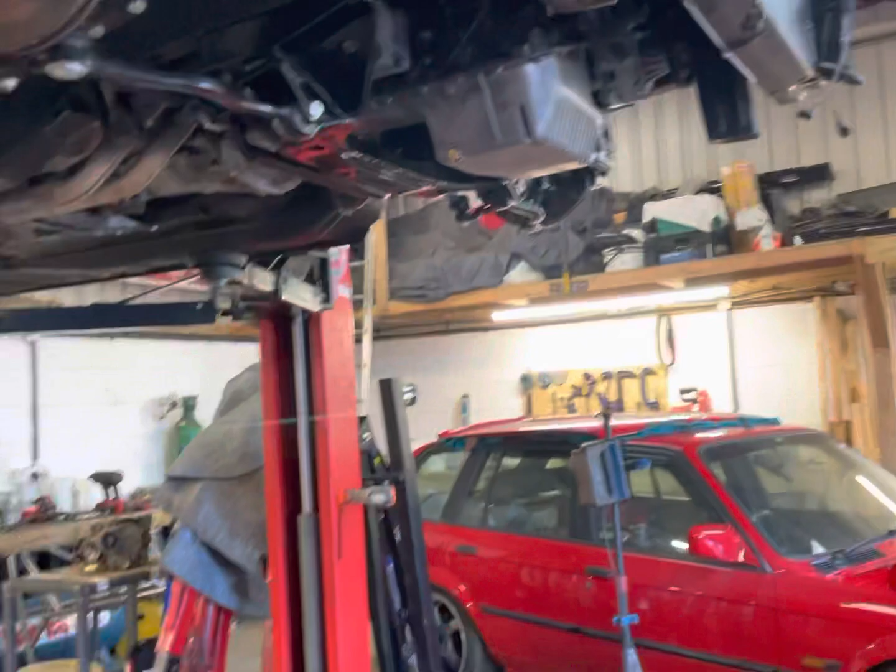There we go, she's outside. So we'll drop the E28 down and I'll let you know what we're doing in today's video.

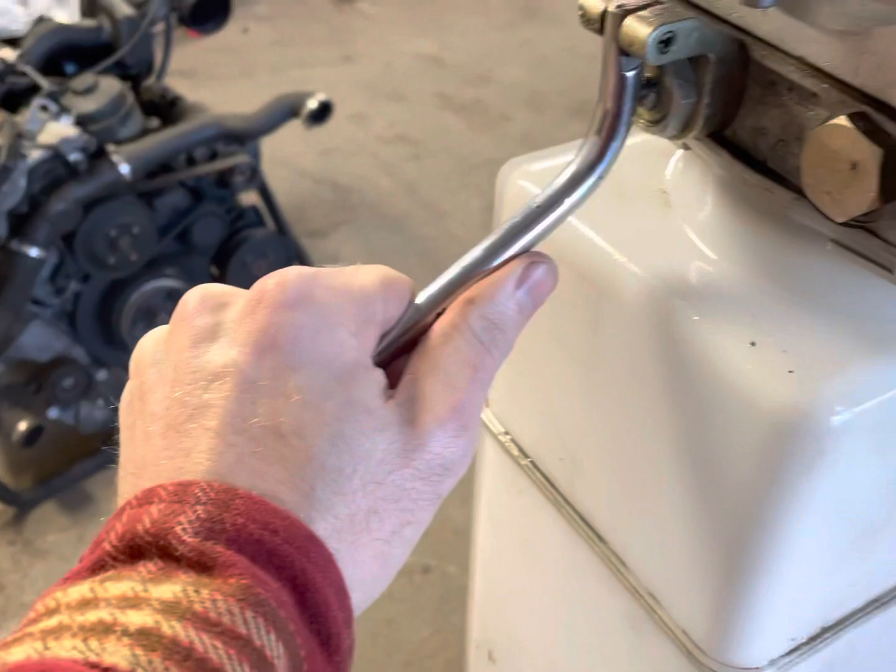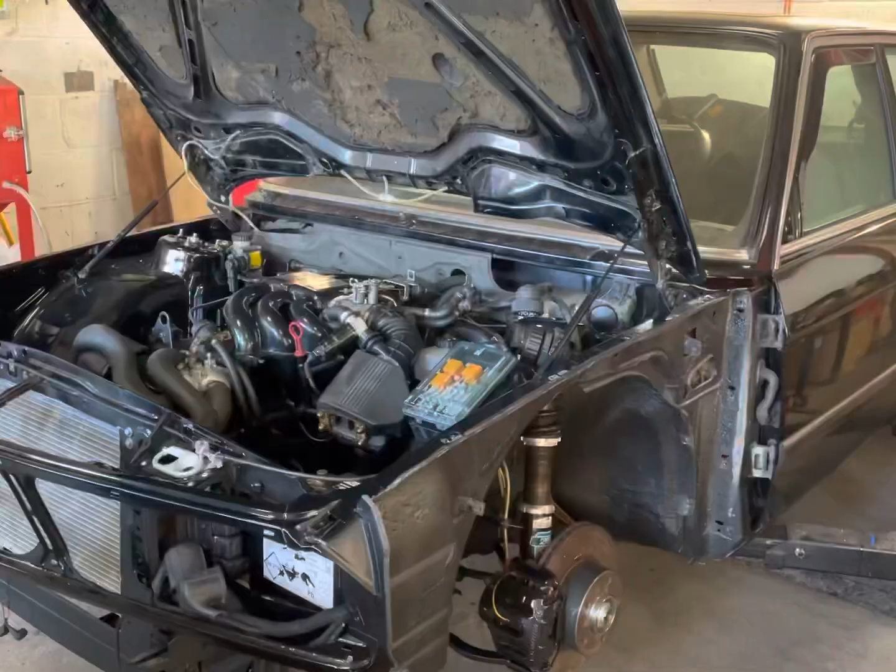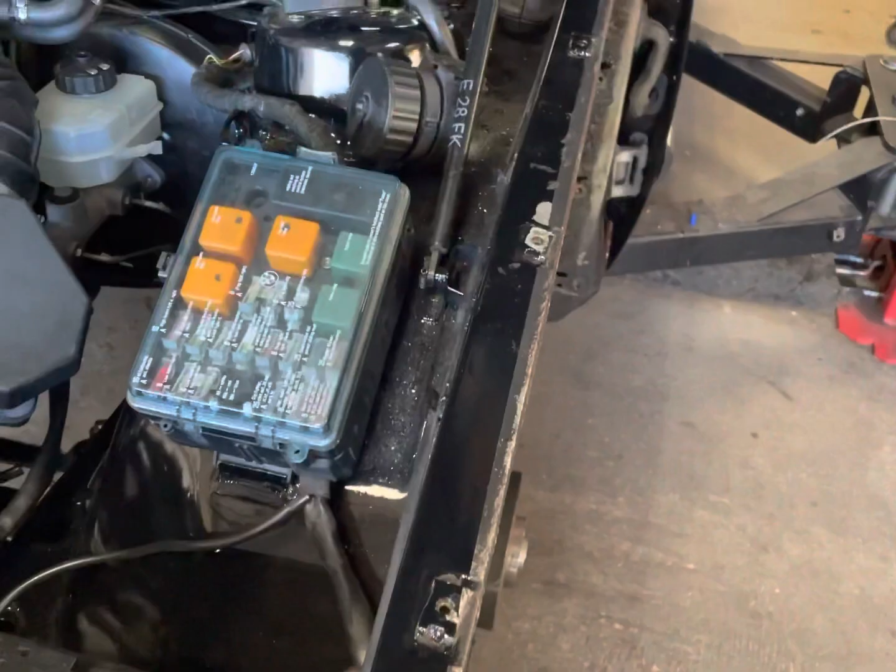So for those of you that don't know, this is my 1987 BMW E28. Obviously it's Euro spec. It came with a 520i, and we've converted it to M20B25 from an E34, so it's the later motor, and it's a 2.5 instead of a 2.

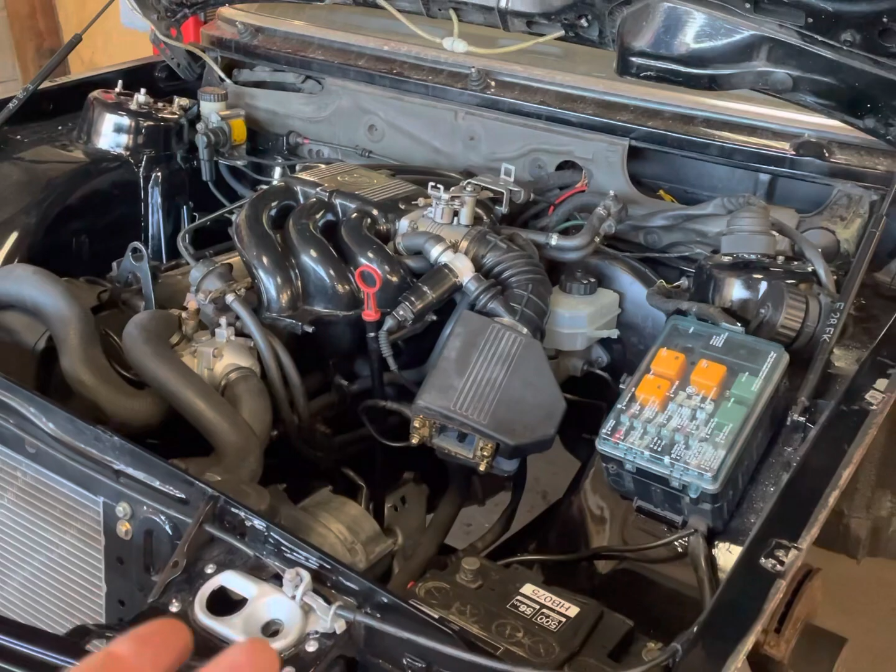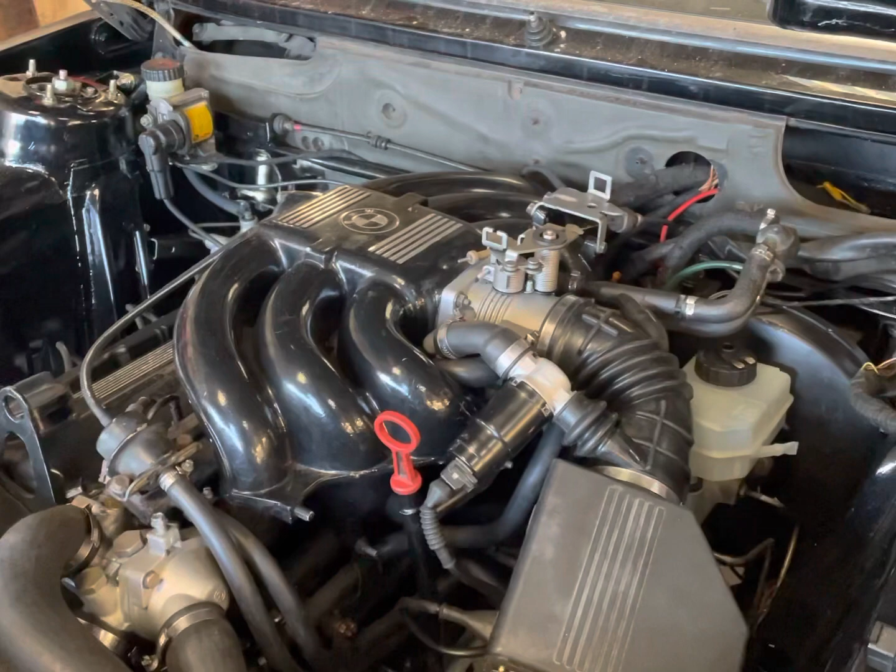If you don't know, the E34 M20s used Motronic 1.3, which is an updated version of the ECU, basically the software for running the engine. There's a lot of differences, they're a much more efficient engine from what I can tell. They're about 170 brake in the B25 configuration instead of 129 in the 2 litre. But yeah, there's lots of updates on this engine, it's a lot better than the B20.

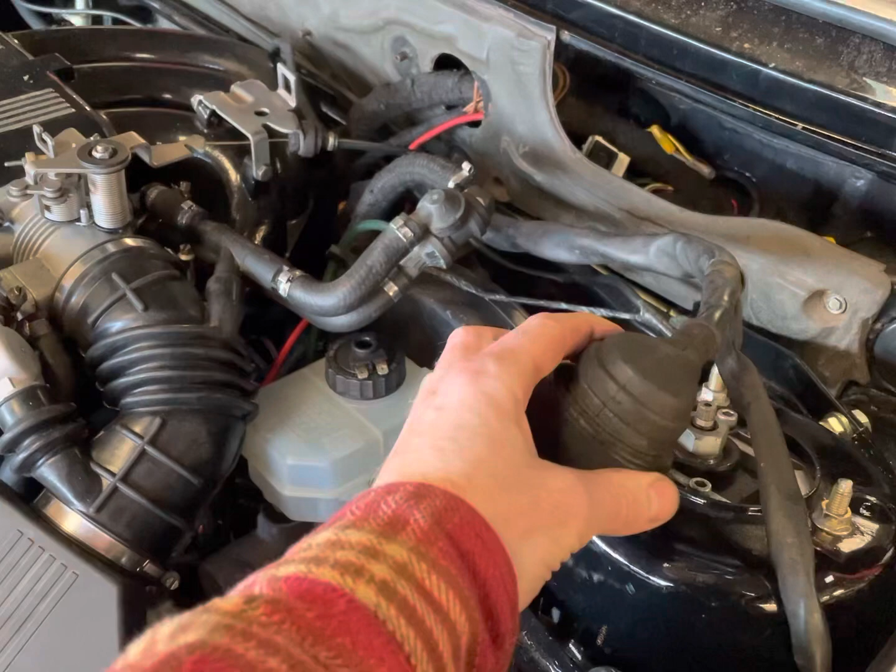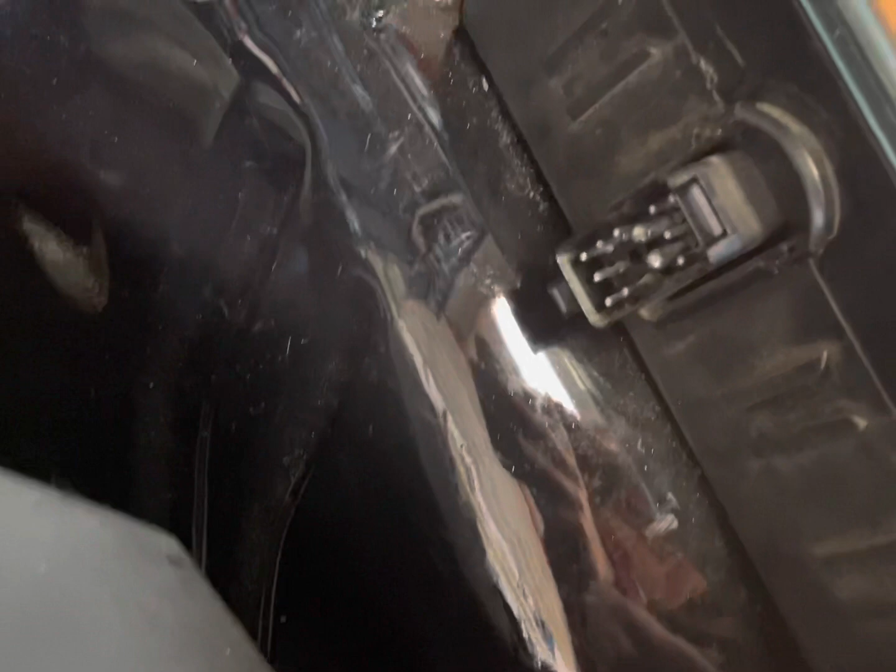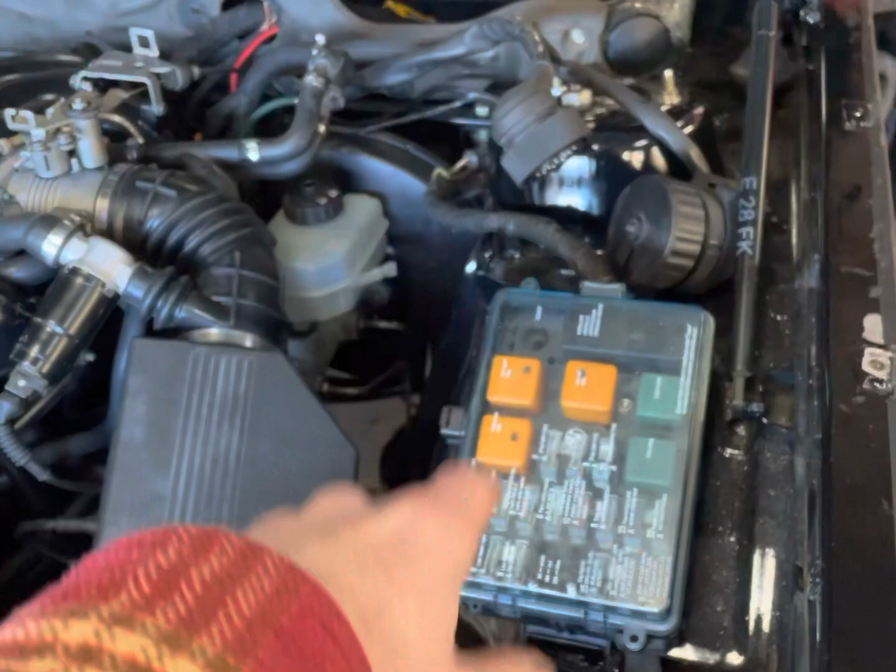Obviously the car uses the E34's plug, which is the E34 C101, this round plug. The E28s have this C101 plug which is square, and obviously this does not fit that. So what you can do is buy a harness adapter, which basically plugs into here and makes everything chooch and run.

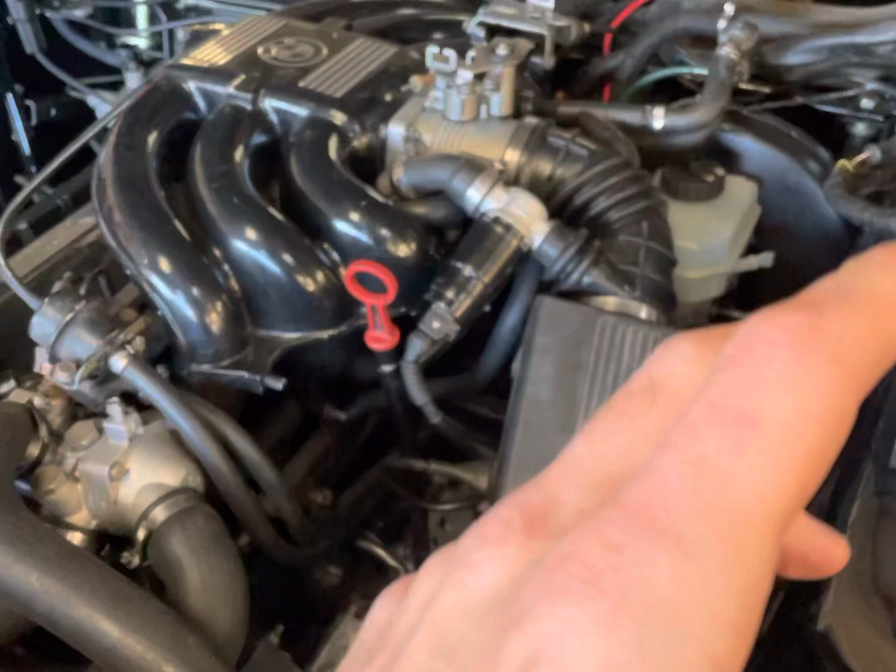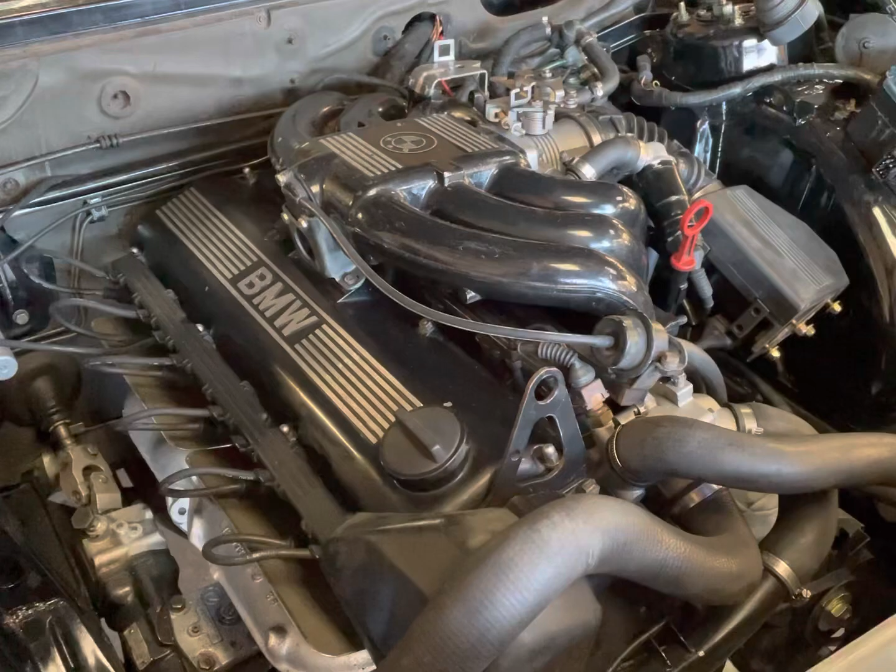I reached out to a company called Condor Speed Shop in the States. They're quite well known for making cool parts for BMWs, so I reached out to them and told them what I was doing, and they were like, yeah, we can definitely help you with that. So I'll show you

the plug for adapting the E34 C101 to the E28 fuse box plug.

So here we have a parcel from Condor. They sent us a nice little beer cozy. We don't really do them over here in the UK, it's not really a thing, but I'll definitely put it to use. We've got a sticker that can go on the ramp.

And this is the Loom Adapter. So I'll get a knife and we'll cut it open.

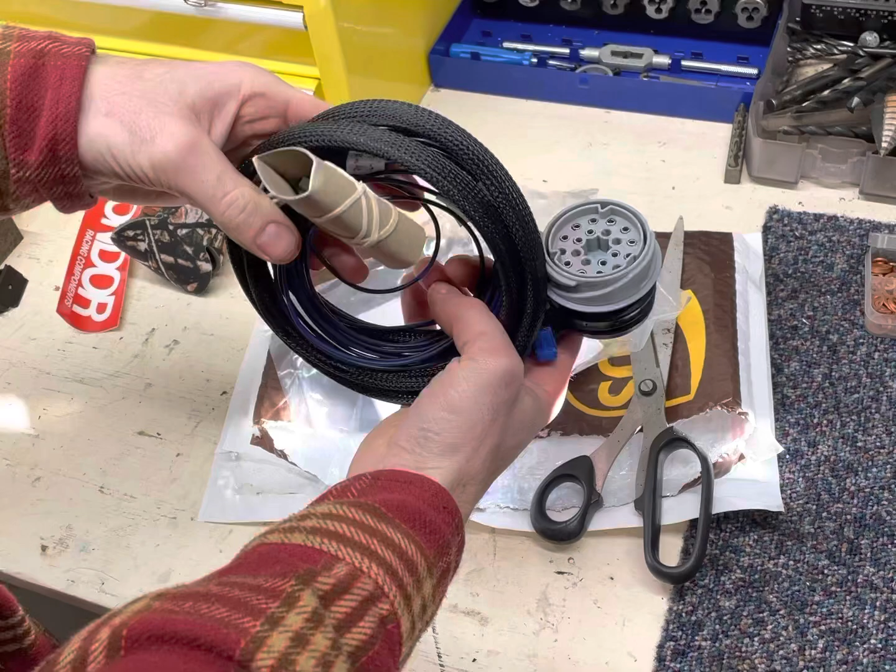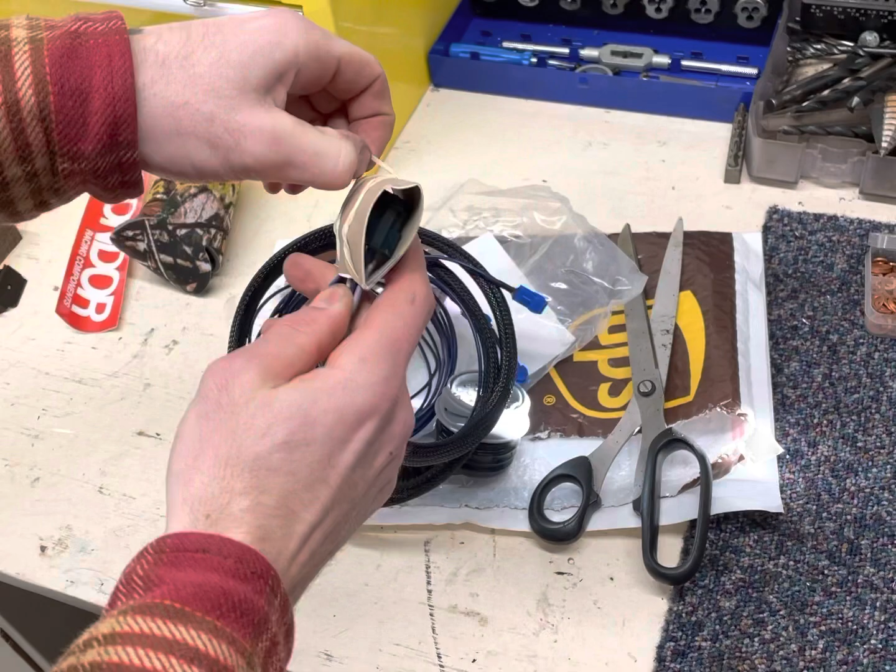Right, so as you can see, we've got the loom here. So you've got the round E34 C101 into the square E28 C101. So you get plenty of loom to go at, so you've definitely got enough room to tuck it away out of the way.

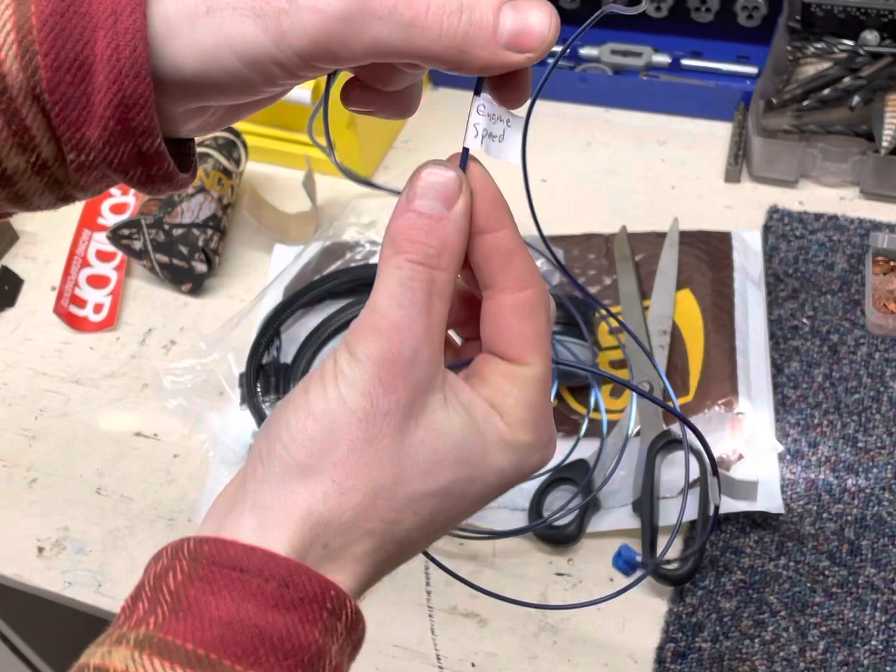There are these alternative sensors, so you have engine speed, you've got vehicle speed, fuel rate, I think that's it, yeah. So you've got fuel rate, engine speed and vehicle speed.

So these, as you can see, they've got like a clip on them, and they basically clamp onto the wires behind your dash. So there's a little plug, I'll show you in the car, there's a little plug in the dash that you need to put these connections on to get your RPMs and your fuel rate on your dash and stuff like that. Obviously the car will run without this stuff, but it's nice to have it built into the loom, and it's as simple as just opening this clamp and shutting the clamp on the wire that's behind the dash.

So it also comes with your instructions. So you've got how to install it basically. Start removing this square C101. Only push or pull from the highlighted areas. The tabs can be damaged if too much force is applied.

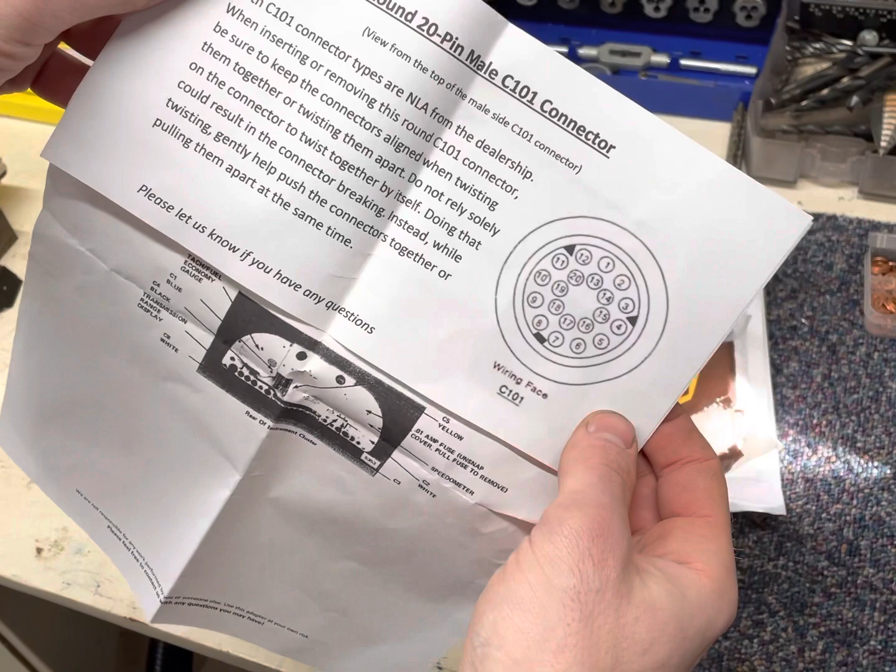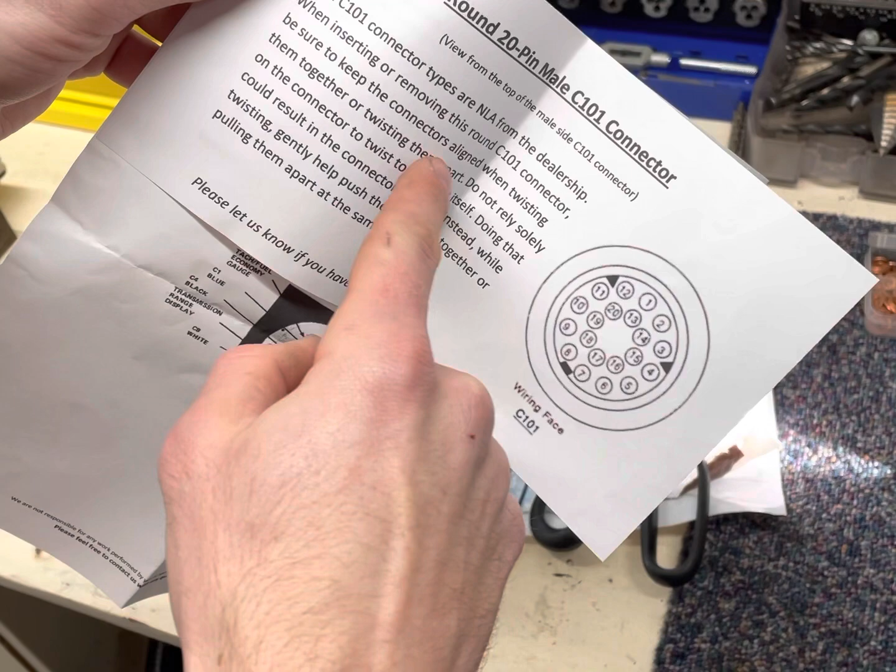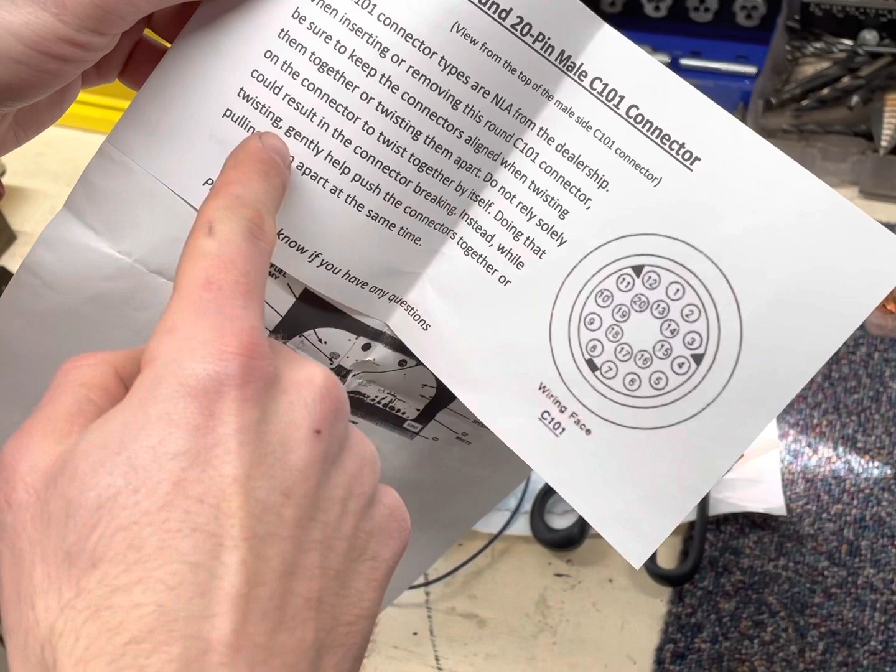And you've got this as well: both C101 connector types are no longer available from the dealership, but when inserting and removing this round C101, be sure to keep the connectors aligned when twisting them together or apart. Don't solely rely on the connector to twist together by itself, as that could result in the connector breaking. Instead, while twisting, gently push the connectors together or pull them apart at the same time.

So you've just got to be careful with them, because these are like reproduction plugs, so they're not as good as OEM, but they're pretty good.

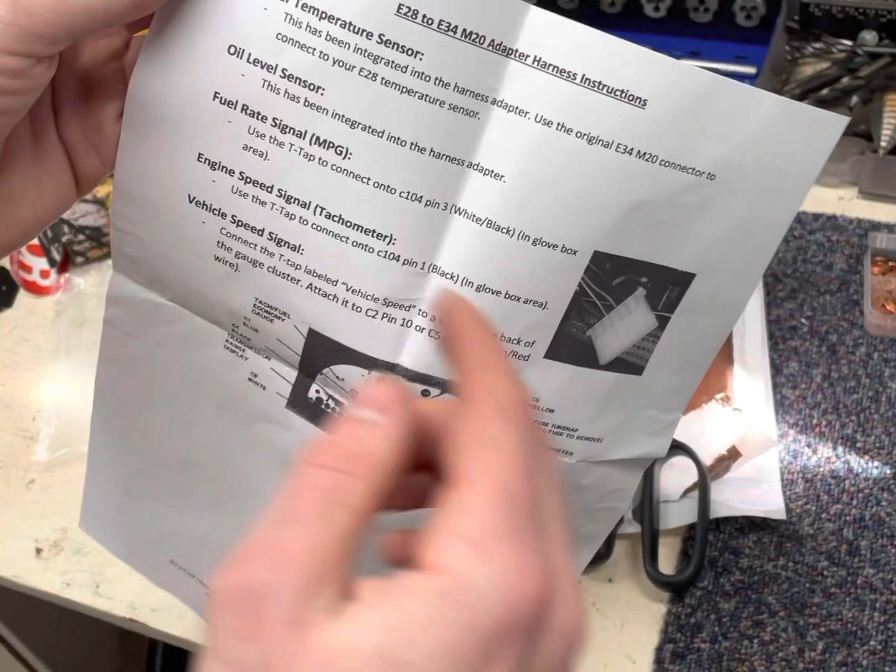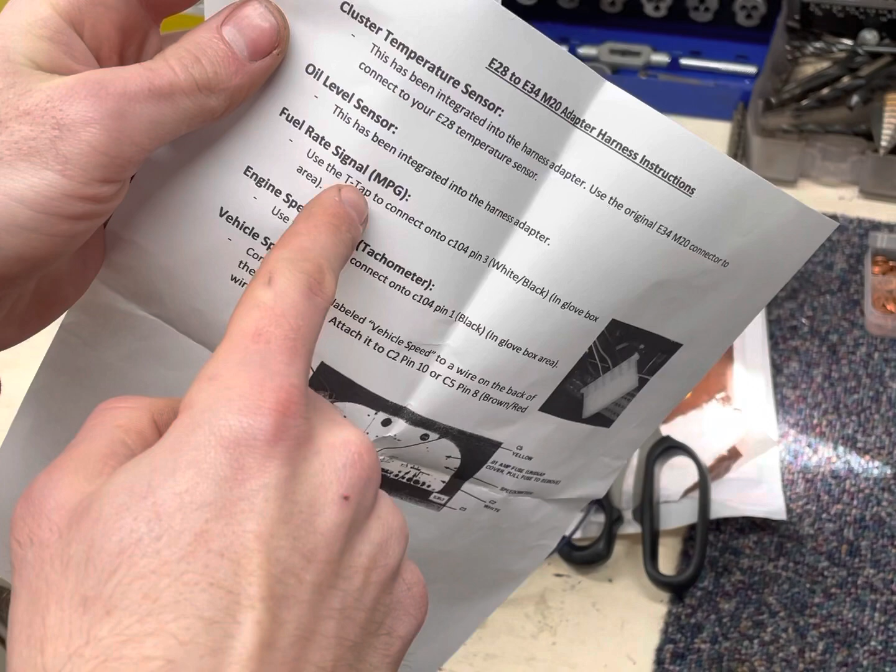And then this is your instructions for the extra. So cluster temp sensor, that's actually integrated into the harness adapter, so you don't have to worry about that. Oil level, that's integrated into the harness. Fuel rate for your miles per gallon, I'll show you that on the car, but it's just using that little T-tap connect into the C104 pin 3 white and black in the glove box.

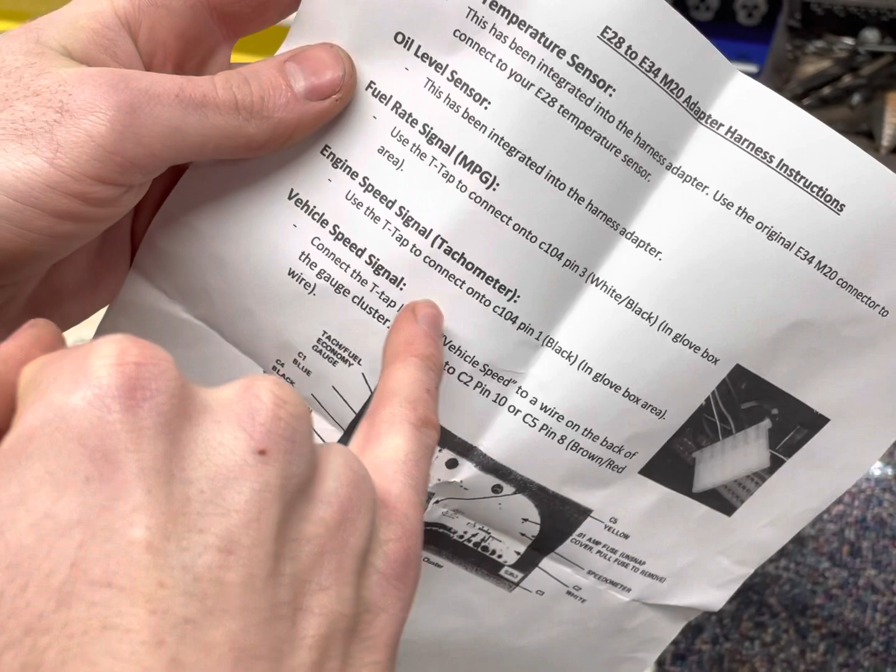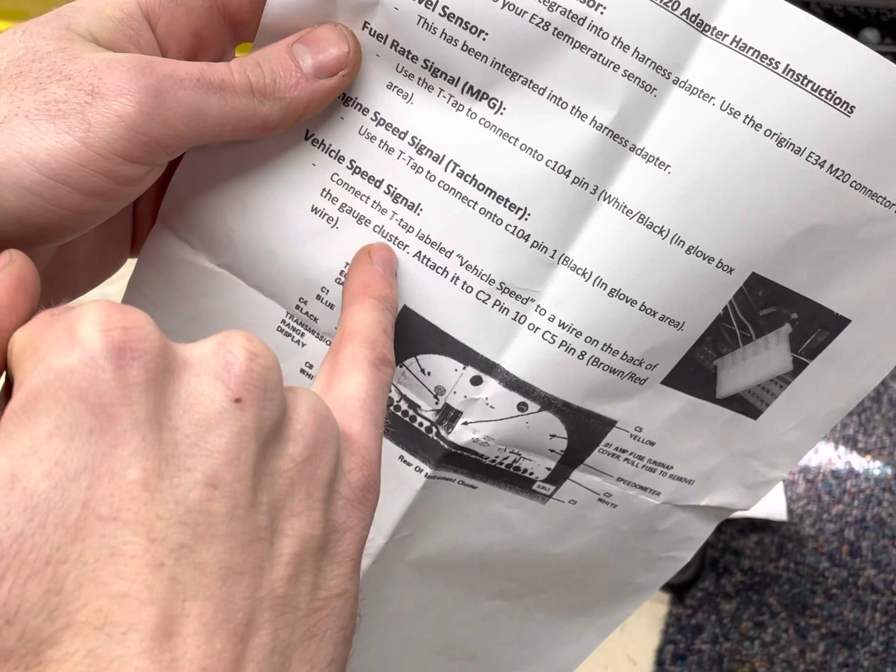They're easy to find, really easy to see. Engine speed, use the T-tap to connect it to C104 pin 1 black in the glove box, that's again really easy to find. And then you've got this last one, which is vehicle speed signal, that goes onto a wire in the back of the gauge cluster, i.e. clocks, if you're a UK person.

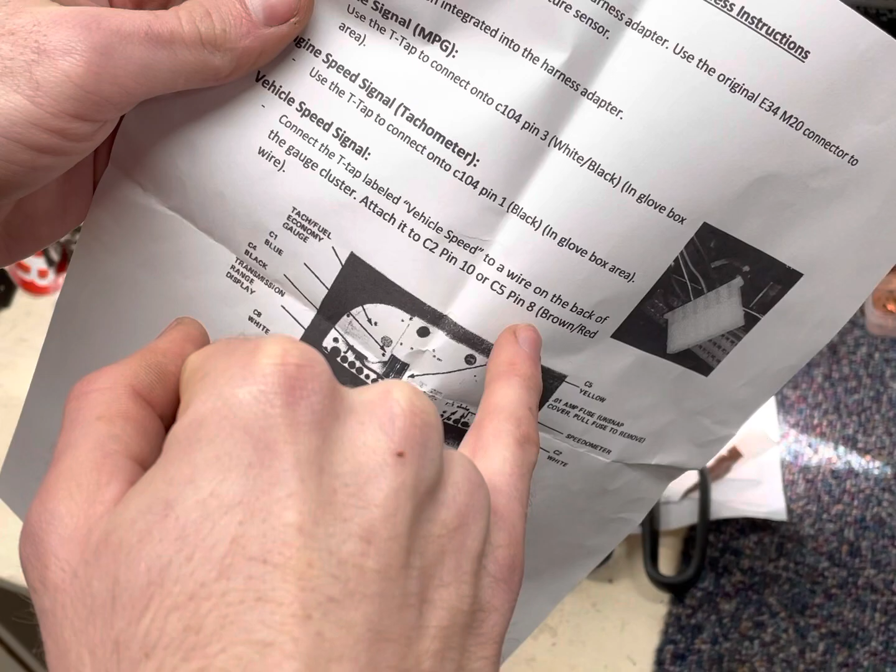Attach it to C2 pin 10 or C5 pin 8, brown and red. They've got the little diagram there to show you how to do it. But for the price, it's a pretty comprehensive thing.

Obviously this is pretty much literally plug and play. You put this on, put your wires in, and it's done. So I'll take you over to the car, I'll show you how it all plugs in and goes together, and then we'll see if she fires up.

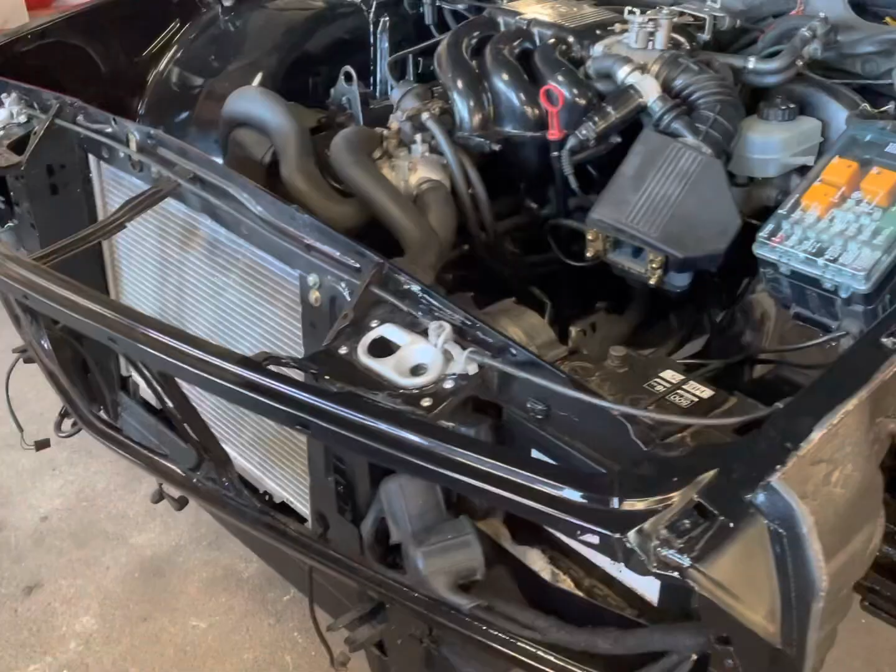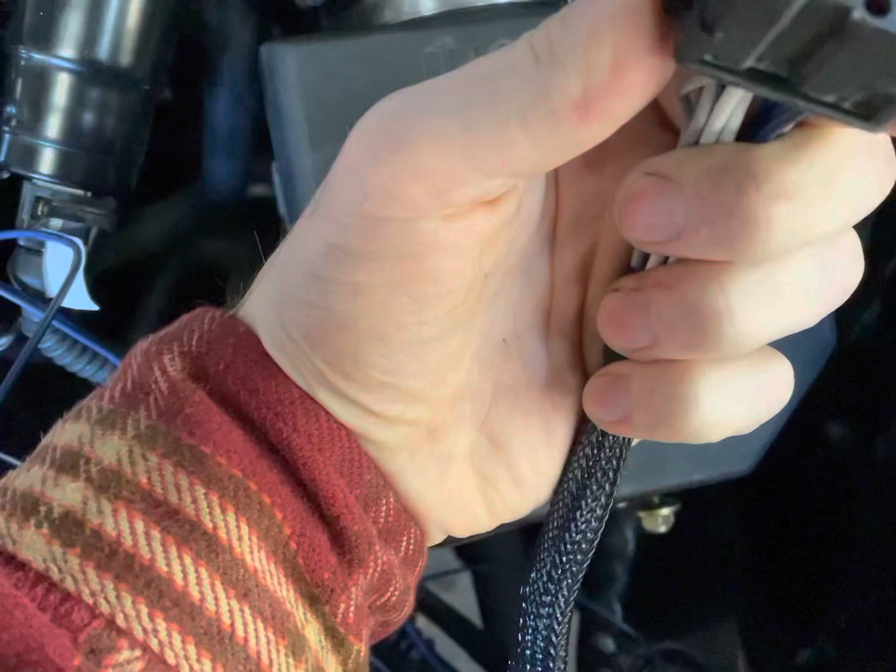Right, so get your adapter, take your square, and check it goes in the right way. Yep, that's it. Just pop it in, so that's in there.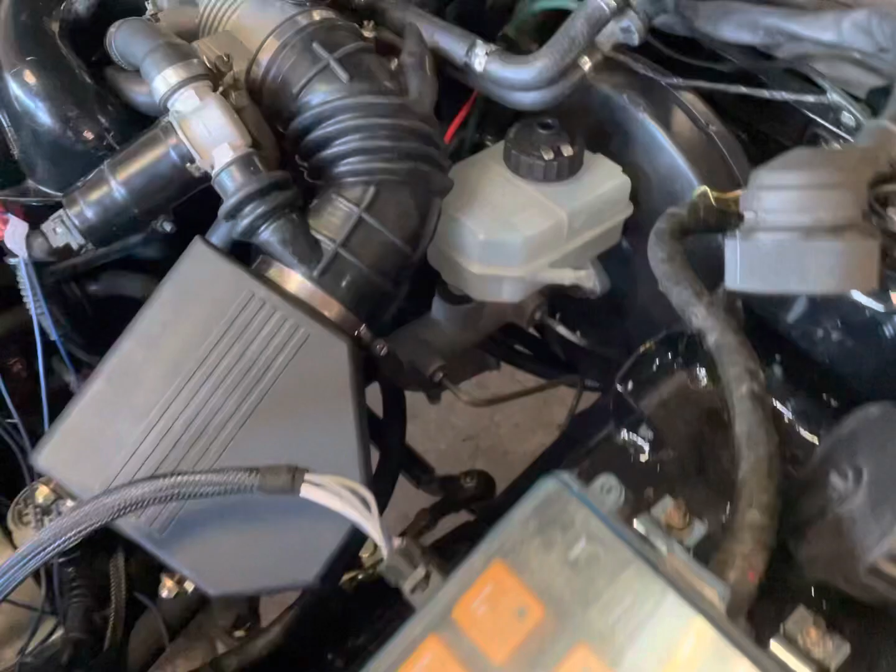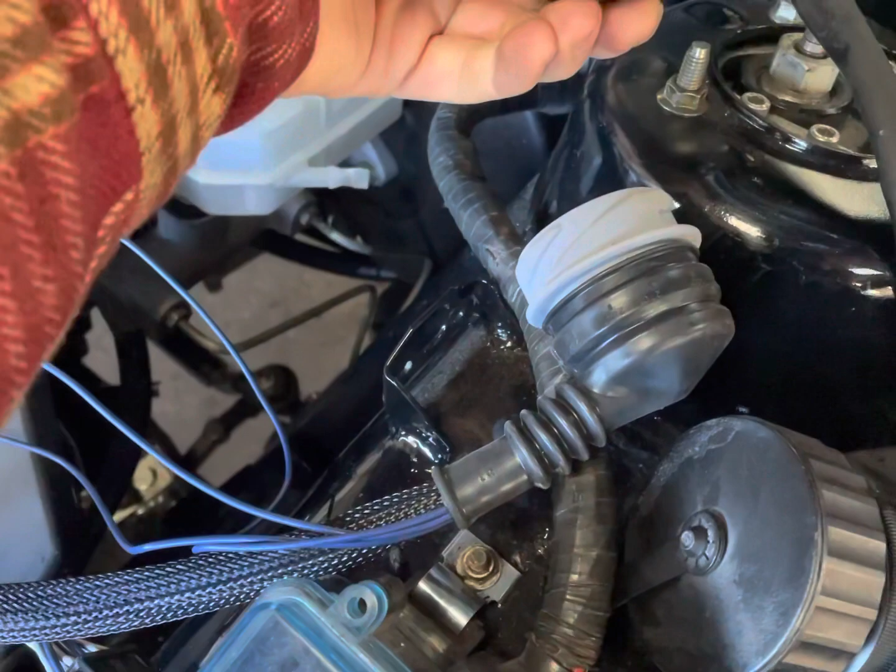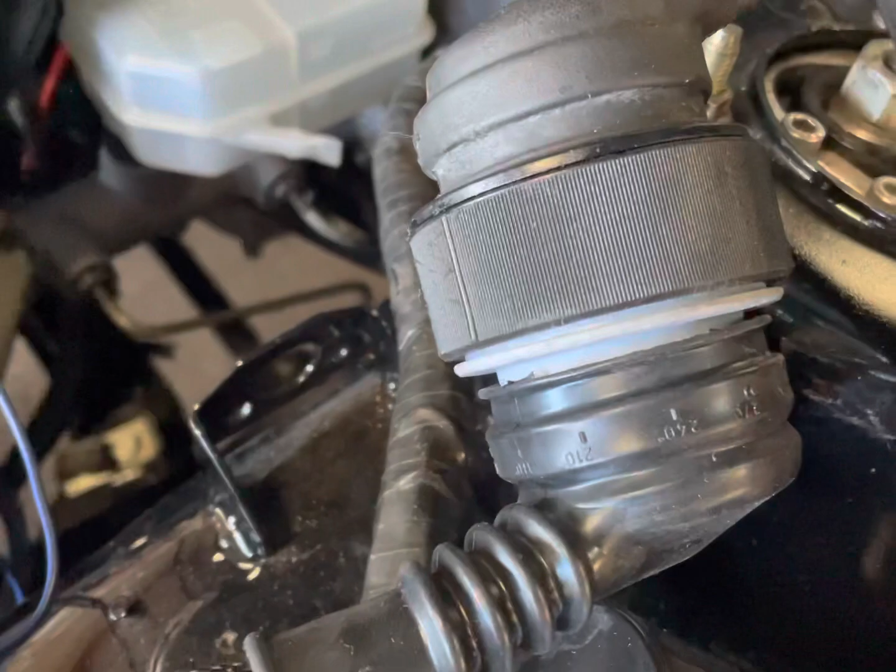And then the C101 for the loom. I haven't got a spare pair of hands, but it goes in there, and I'll show you it together. There we go, that's installed. It fits really nice into that connector, but it's a two-hand job. You've got to pull them both together while you twist that, otherwise you risk breaking the plug.

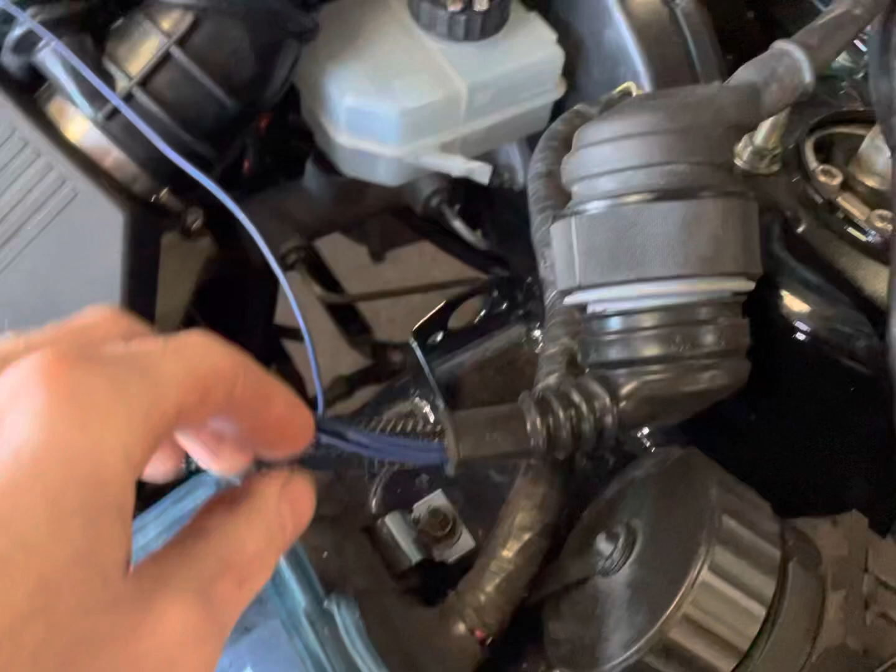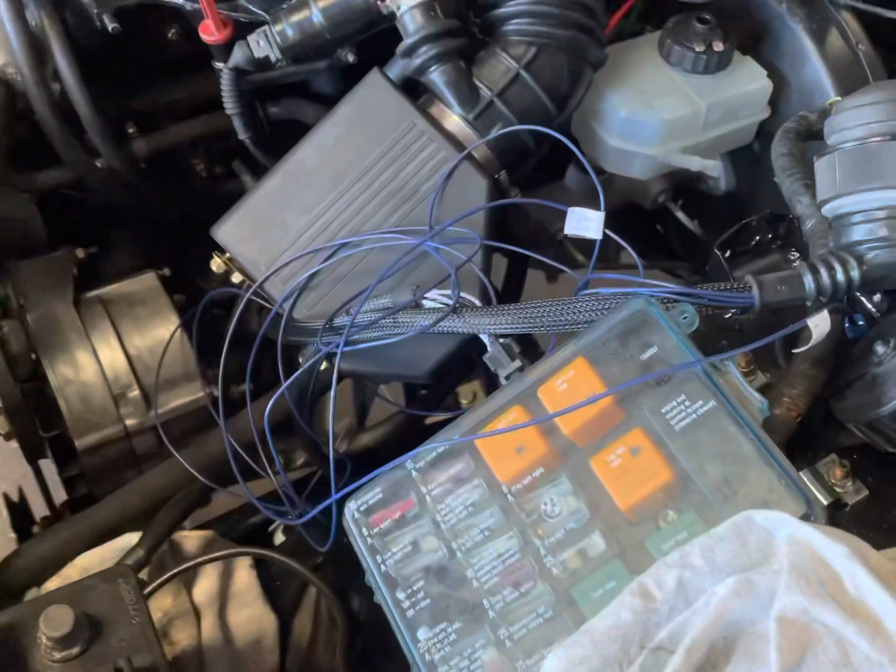So we've got these two in. Now the only wires that you need to manually splice into your car are these three. They're basically accessories, and there's plenty of length on them to go into the cab. So you put them through that gap there, just feed them through, and then you can put your loom wherever you want it in the bay, because you've got so much extra wire for your connector that you can just route it wherever you see fit.

So we'll plug her in, and I'll show you, see if the car starts. Get that out of the way, don't want anything to get caught.

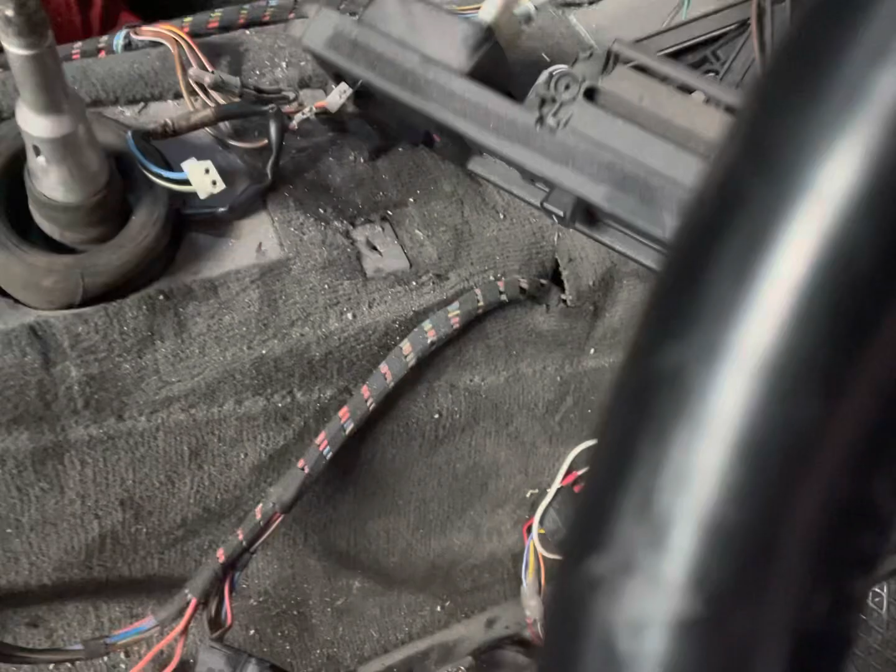Right, so turn my blowers off. They don't need to be on. As you can see, all my sensors have come up for the power, so let's see if she fires up.

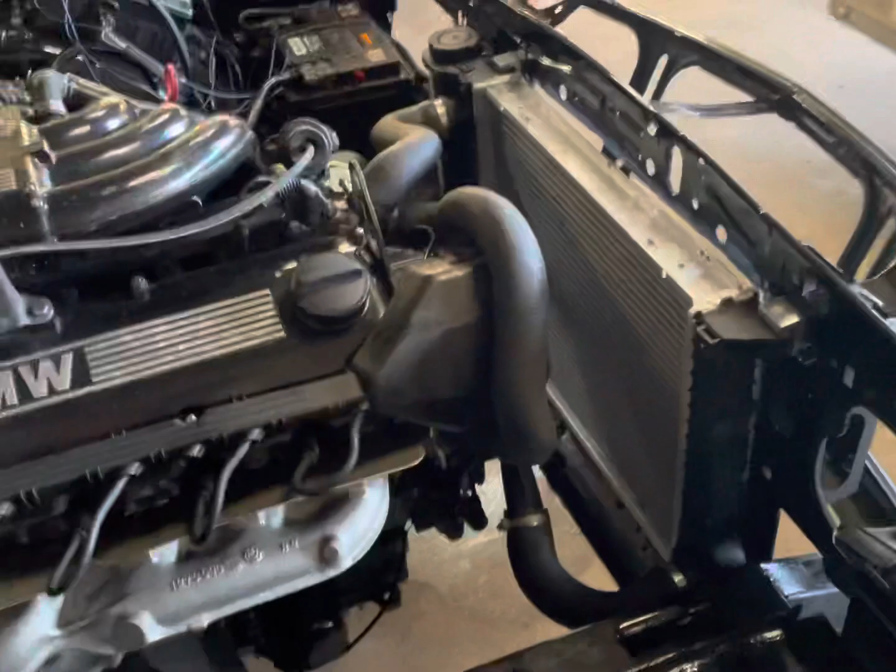She lives. As you can see, all I did was put the loom in, and it fired straight up.

It's got a bit of a wobble on, a bit of a rough idle for some reason. Yeah, she's alive, boys. Feels good.

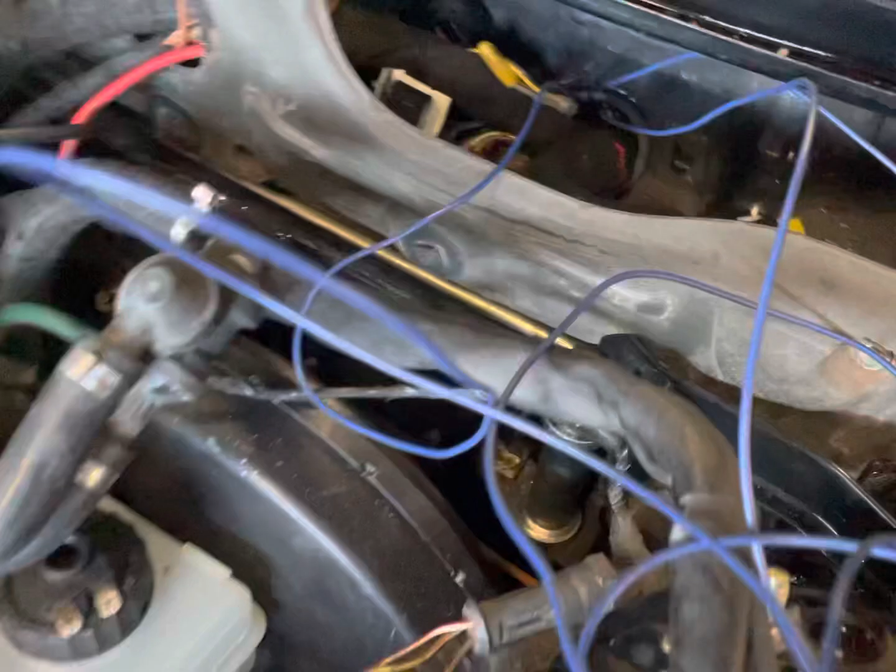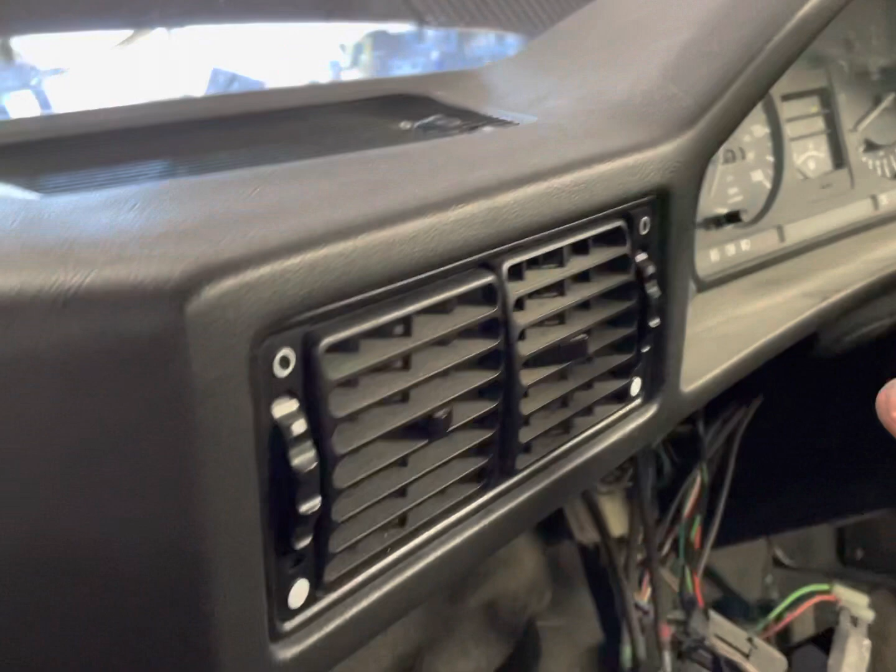Right, so I fed those wires in there, these are the three accessory wires, and they come into the glove box. You should be able to see them poking through, but there is this little plug here. It's got the black and white wire and the solid black wire for the sensors, so there's two to put into this plug, and then you've got to run one down the back of the dash to the back of the clocks. Behind the cluster there's another wire that you just put in - I think that was vehicle speed, I can't quite remember, but yeah, easy as that.

So got my loom, there's my ECU. Need to mount that up somewhere, but yeah, really straightforward. It makes, if you're like me and you don't like wiring, it makes it such less of a headache, because you literally just buy the plug, plug it in, run some wires, engine runs. It's mint. So yeah, definitely happy with that.

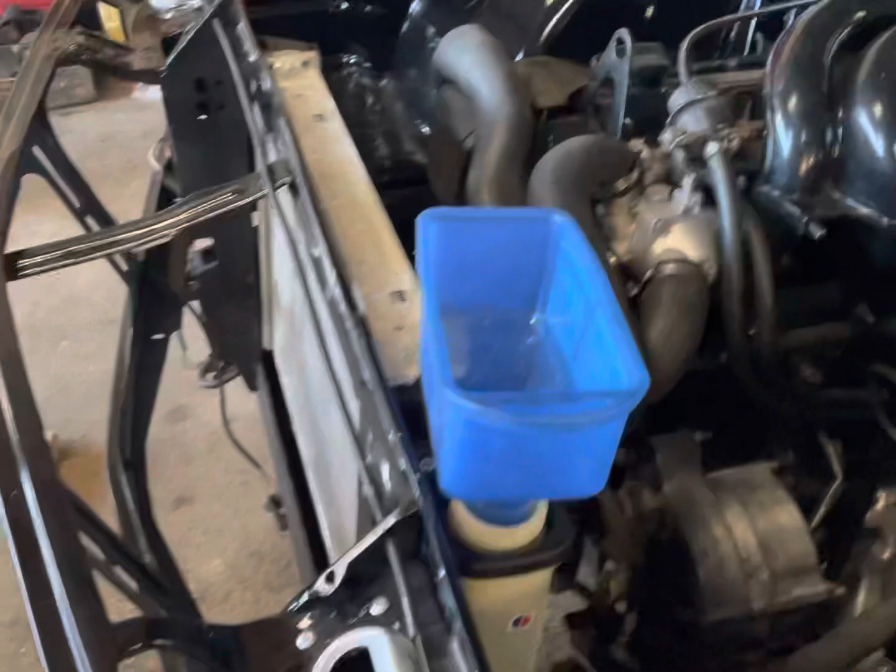At the minute I'm trying to bleed the cooling system on the thing. So if you remember in the last video I made the bottom rad mounts, I'll show you the top one.

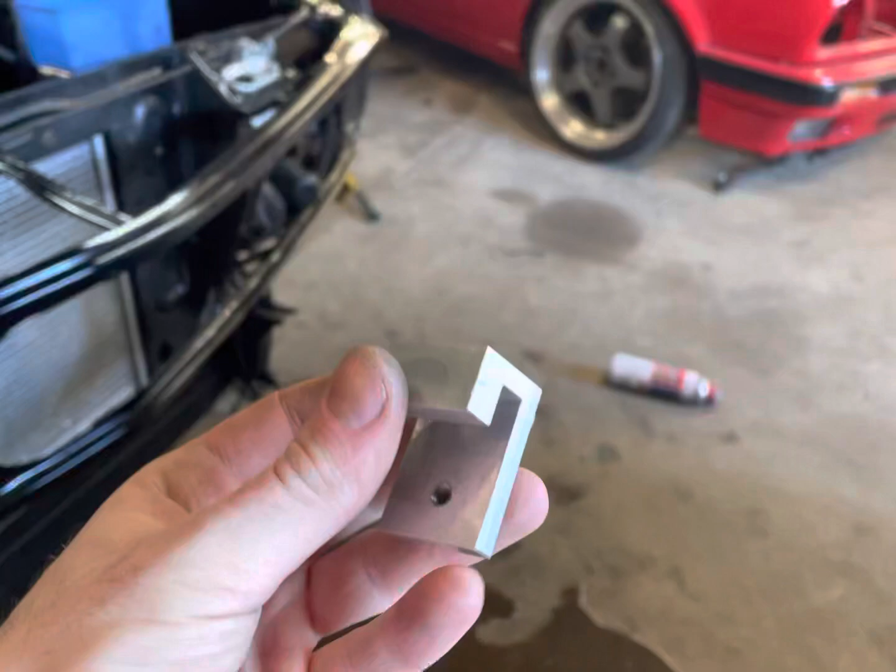So this is my top radiator mount, just slots in there, pushes up against there, and I have two holes behind there to mount it to, and that's it. Just stops it from moving about - when they're in, the radiator doesn't move at all.

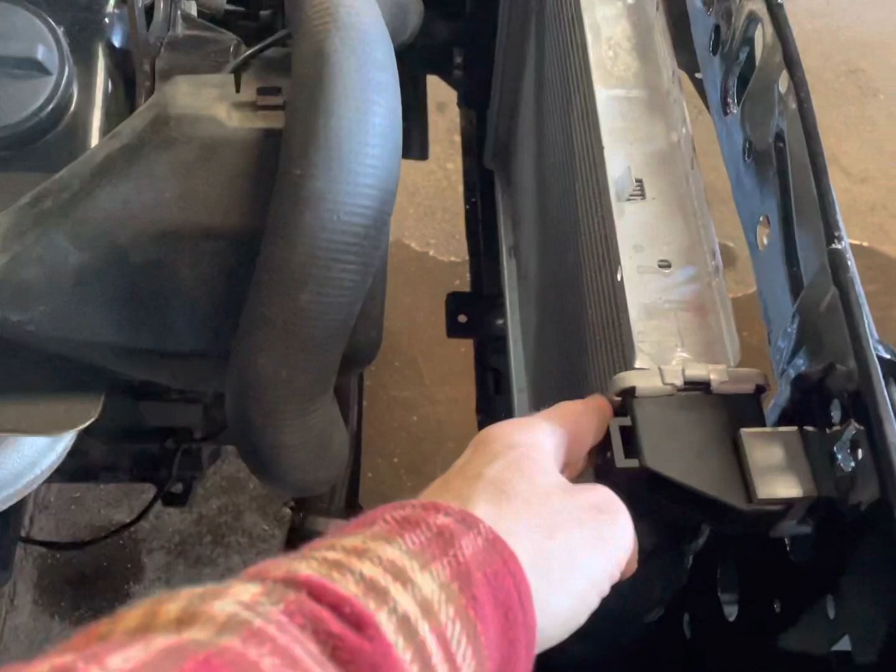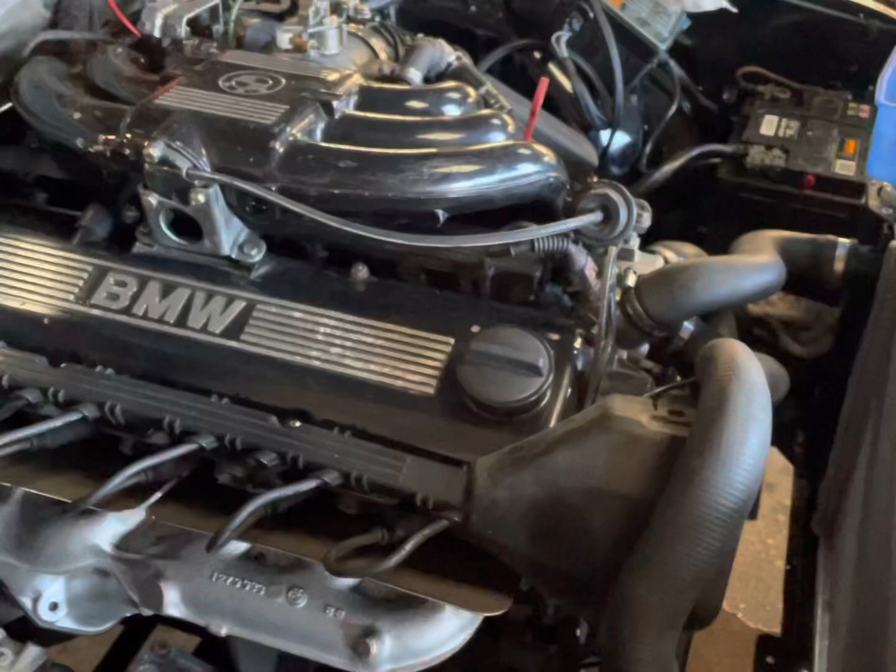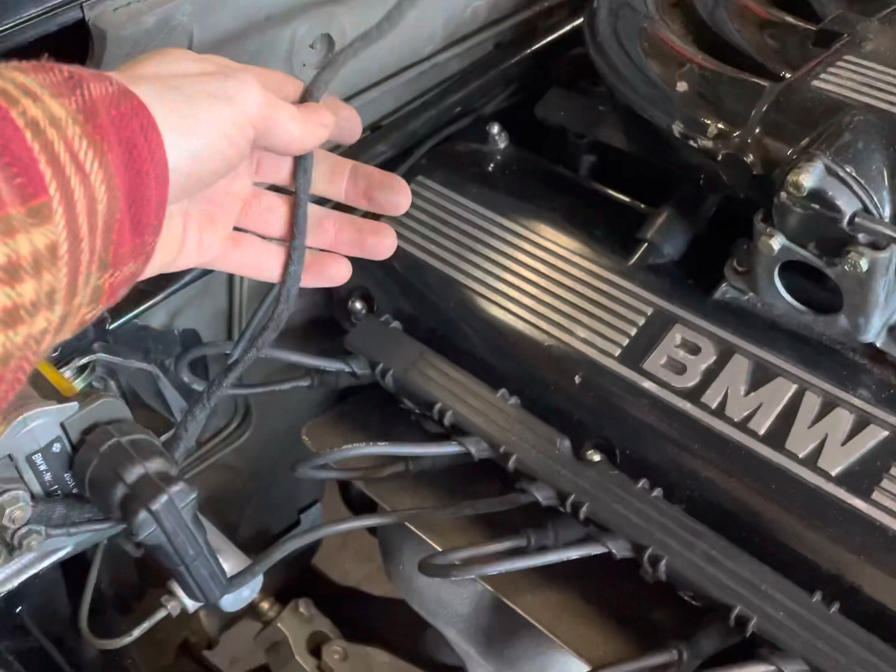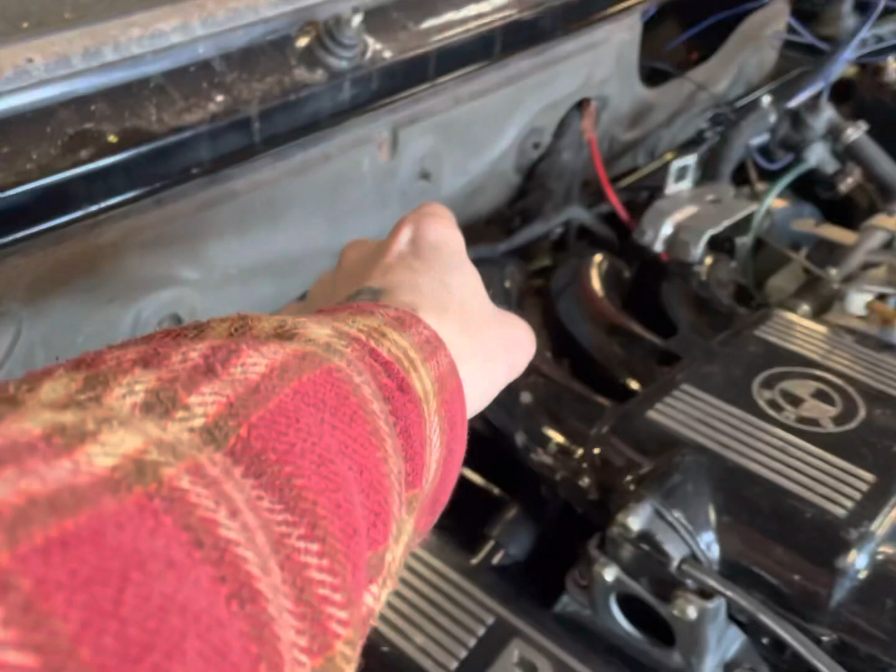So yeah, we're just trying to bleed her up, get the coolant in all of the passageways, and yeah, it's coming together. Loom's ran all up there. I've tidied up, had to run an extended loom, extended wire from the ECU for the coil, because it was on this side. On the E34, the loom comes across the bulkhead here and it goes into this side, but obviously on E28s it goes that way.

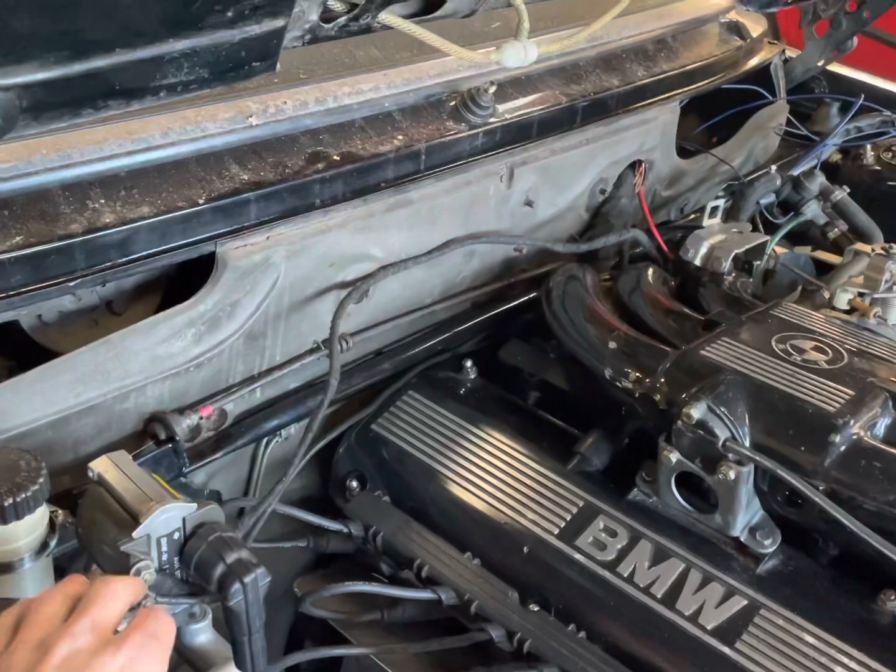So the wire for it, the power wire for the coil, wasn't long enough, so I've just had to extend it, ran a new wire. Cheers to Stay Kelly for giving me a hand with that.

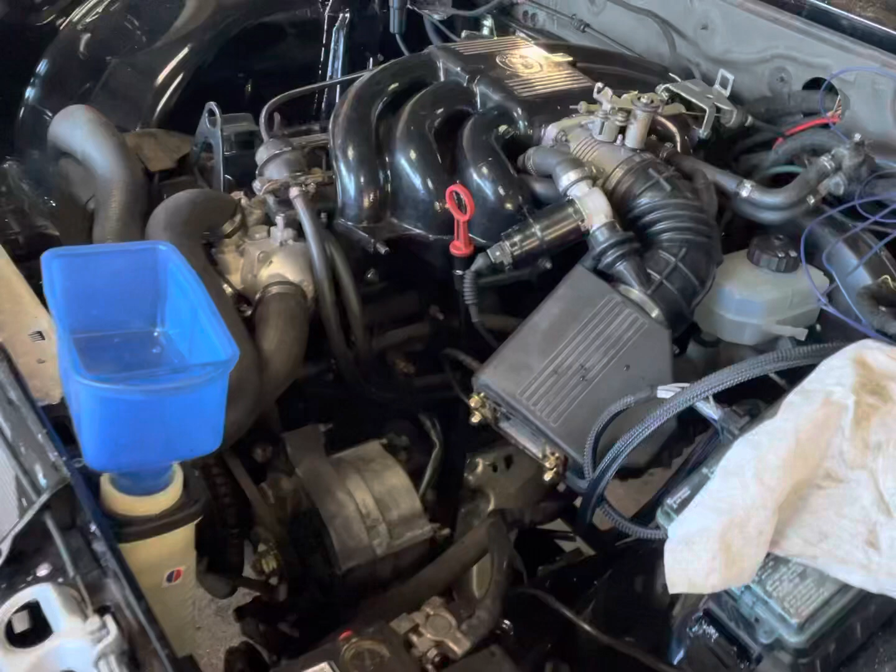But yeah, as far as the engine swap goes, everything's pretty much in. Clutch needs bleeding, coolant system needs bleeding, then brakes need filling with brake fluid because there's nothing in them. And that should be it. Ready, good to go, good to take it out for a test drive.

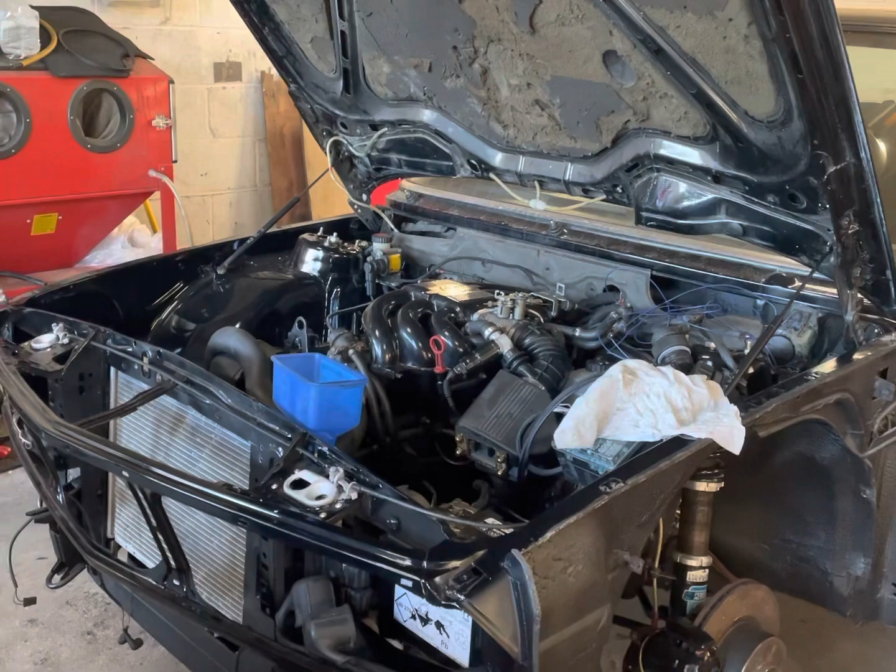I imagine it's going to be a lot quicker with this, 170 brake instead of 100, if that.

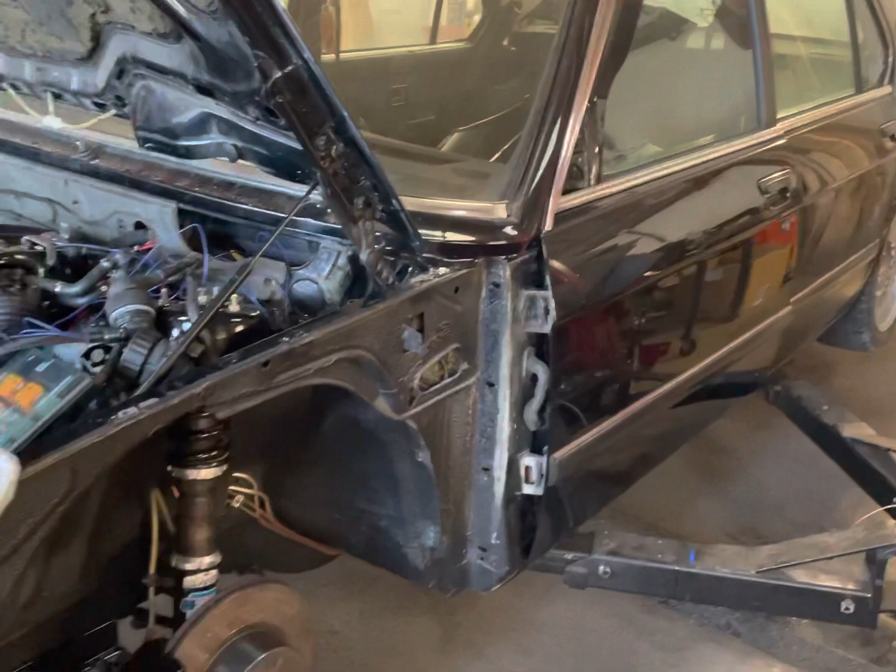Right, so if you can see, I've hooked those wires in. The one behind the gauge cluster or clocks is in as well. So we'll turn it on, see if it works.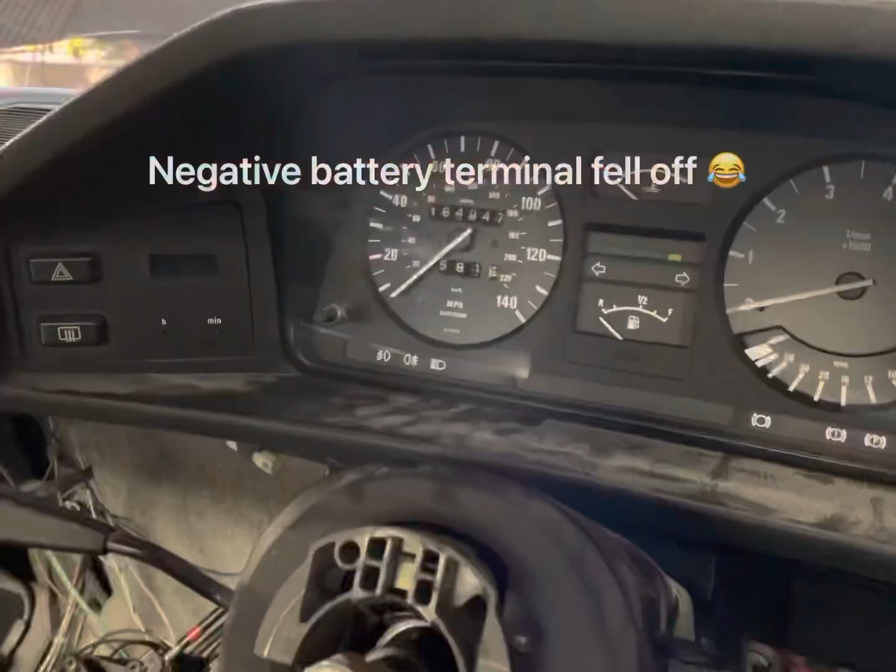Oh, indicator off. Oh dear. There we go, we have a rev counter, lads. Sick. Happy with that.

So as you can see from my splattered wall, the exhaust is also absolutely black. So what's happening is the car has E36 328 Sport pink top injectors, which you might be able to see in there, and they flow way too much petrol for the engine to know what to do with it. So it's running way too rich, which won't be helping the idle problem.

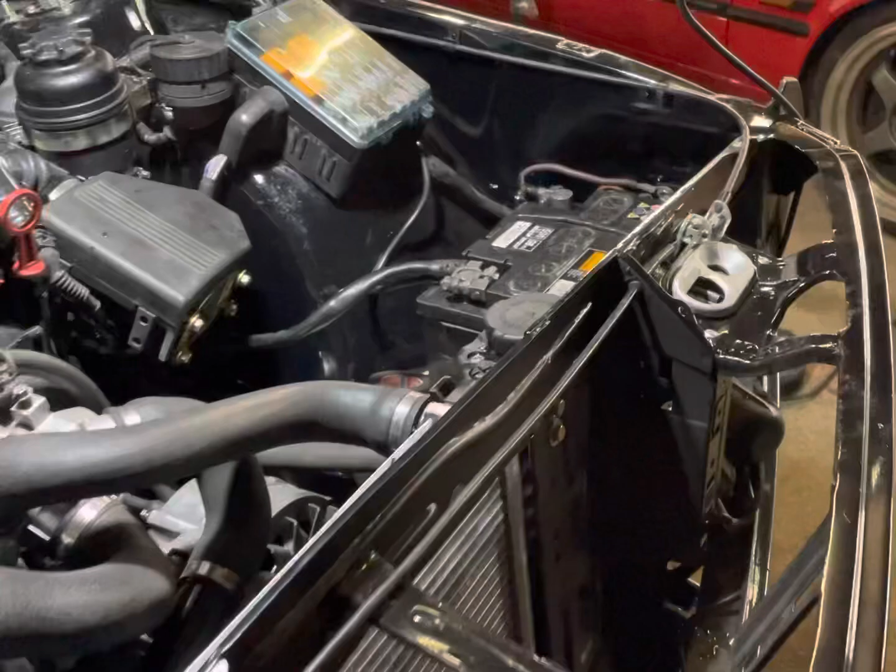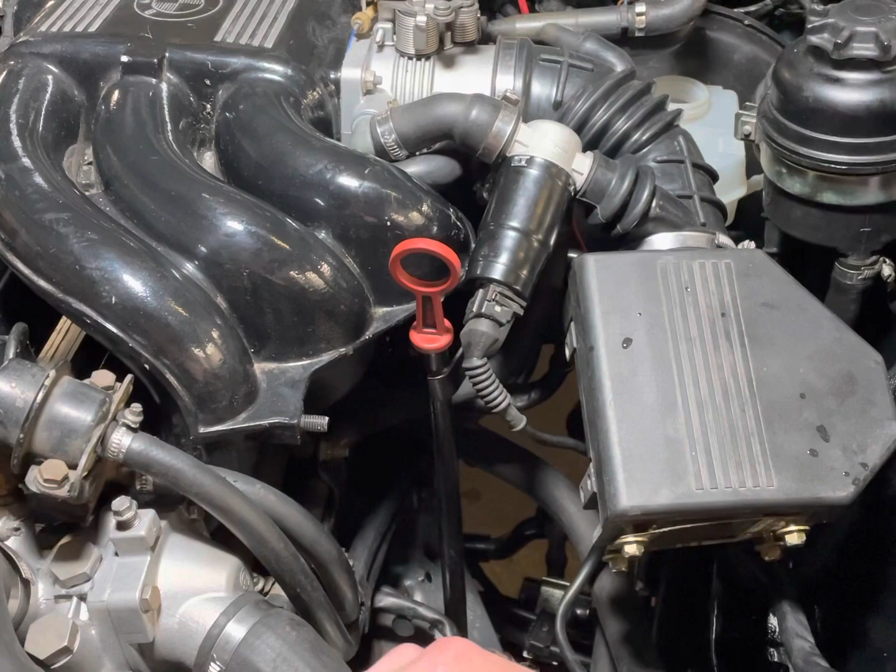It's also, when you unplug the MAF, the idle goes smooth. When the MAF's plugged in, it surges. So there's a bit of research to be done, I think, see what we need to do. I think I'm going to have to just get 2.5 injectors for the rail, and I don't know what to do about the MAF. I'll have to look into it.

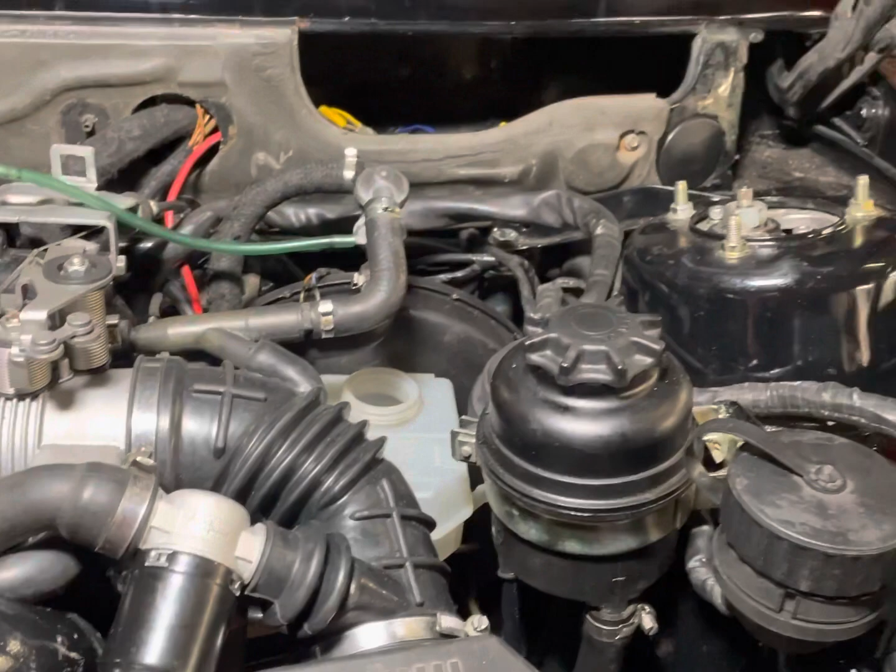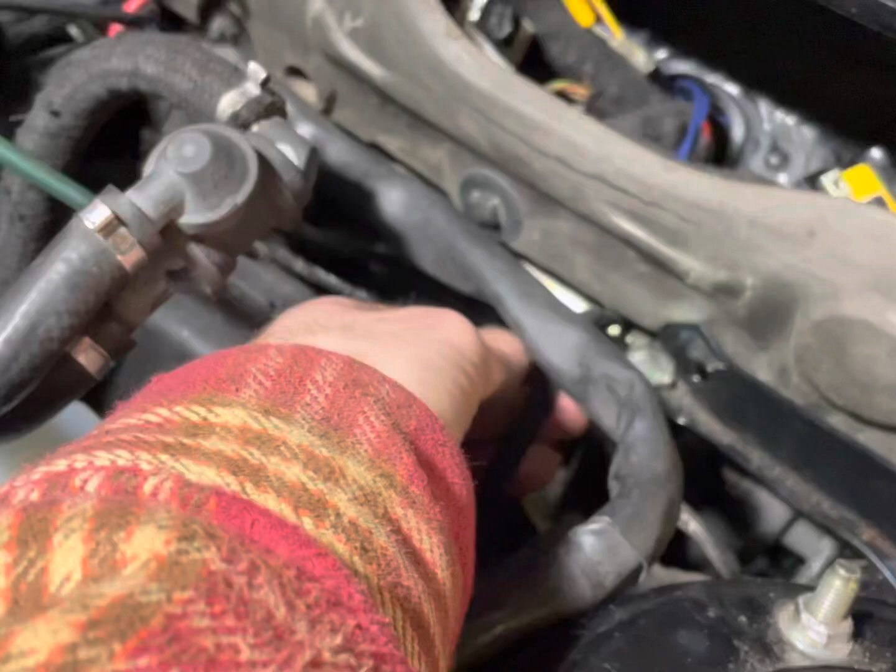But yeah, mounted all my power steering lines, so they're all put in now. Mounted this diagnostics port on the side of the fuse box with the original little clamp. The engine harness is just behind there, tucked in that corner. And I've also ran my 3 extra wires off the adapter through here and in there, so they're all tucked in now.

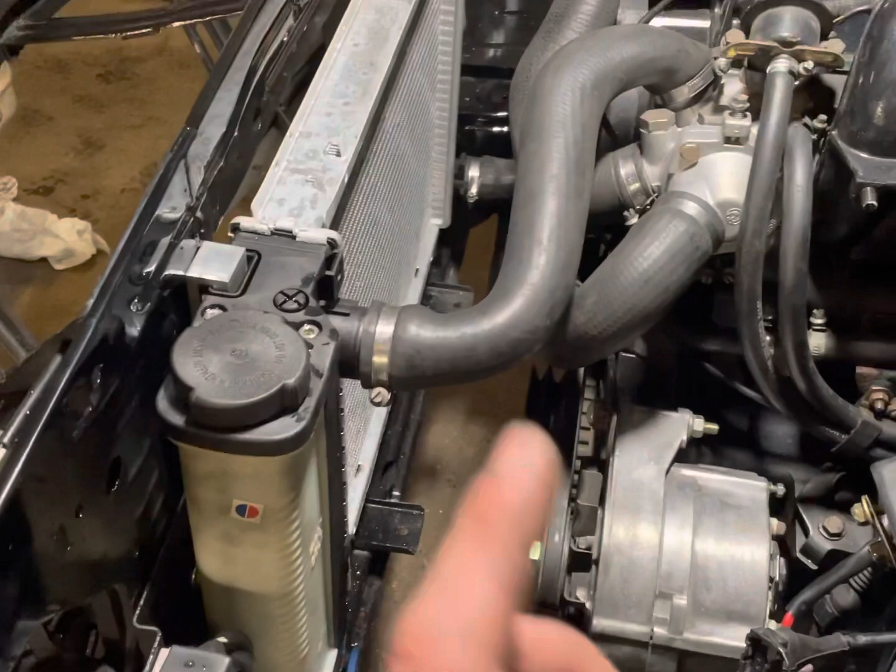So yeah, coolant's bled, thanks to Pete and Elliot for helping me bleed that up. And yeah, pretty much just teething problems. I need to do the brakes, I need to bleed the brake system. Probably going to just use an air-fed bleeder to try and expedite that process a bit, and go from there.